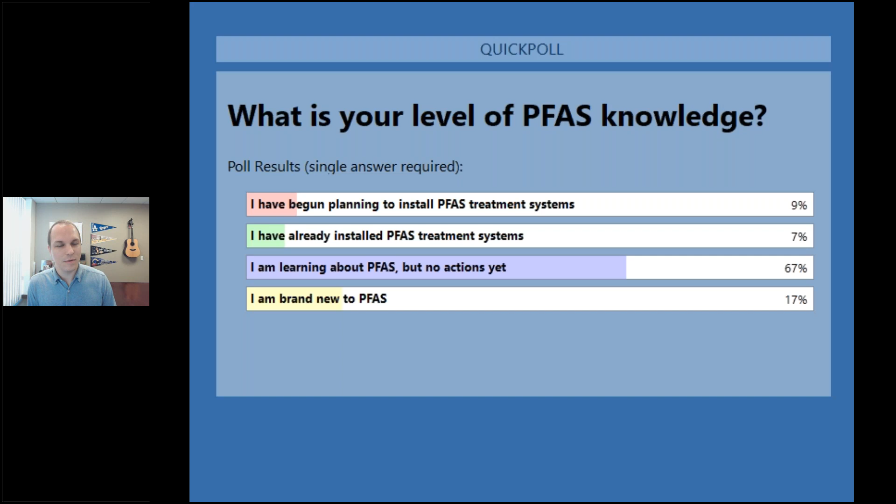All right, so a lot of people are either brand new to PFAS or just learning about it, but haven't really done anything around it yet, which makes sense. We're going to talk about why that is with where the regulations are at. And then there's a few of us that have already dipped our toes into it, or rather been thrown into the deep end of PFAS. And I'm glad we have those people online too to leverage that expertise. Next question for us, Maya.

What is your role? I'd like to kind of understand who we have here on the line, whether you're a regulator, a water or wastewater treatment system or distribution system or collection system owner, or maybe you're an operator, or maybe you're an engineer or consultant advising these types of folks, or if you don't quite fit into any of those boxes, maybe you fall into the other box. Let's take a second to answer that. All right, closing the poll here in 3, 2, and 1.

All right, about half the audience are on the regulatory side of things. We've got some system operators and owners in the house, maybe about a quarter of us, and the rest are engineers or consultants, and some that fall into the other category, maybe some technology folks out there that are looking at technologies around PFAS. So good mix here, heavy on the regulatory side, which is great.

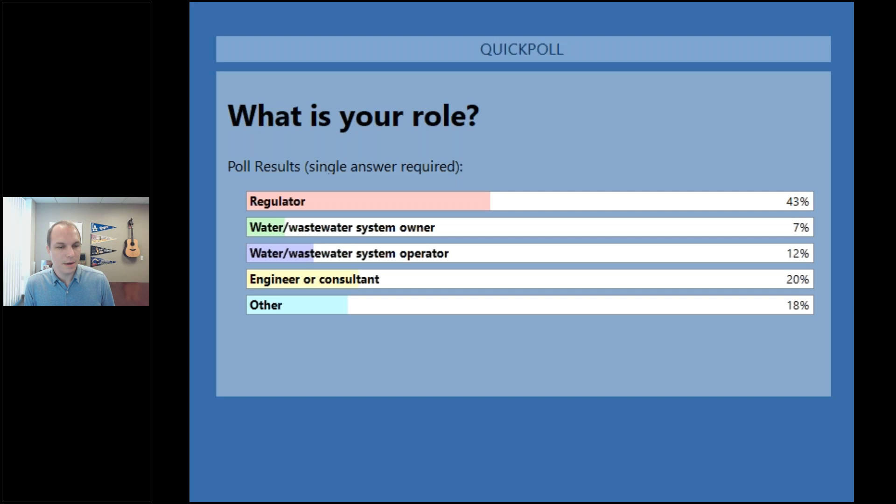And then our final question here, I'd like to understand what you all are most interested in as far as PFAS goes. Is it PFAS in drinking water, wastewater, recycled water, stormwater, or is it something else? And I would put maybe impacted sites, contaminated sites, site cleanup in there, or air quality. We only had 5 options here on our polls, so pick the best option for you. Let's figure out where the concern is, and we can kind of tailor our discussion around that. All right, closing the poll here in 3, 2, and 1.

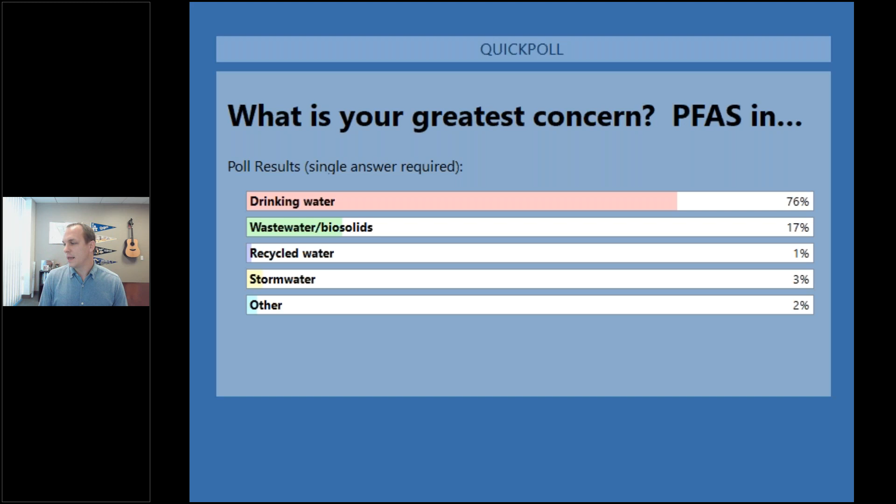All right, drinking water. And that makes sense, and we'll talk about why that is. That's where the greatest level of regulation is and where it's headed. A good bit of wastewater here as well, not so much heavy on recycled or stormwater or something else. And we'll see that lines up really well with what I was expecting, and because of where the regulations are at, why this might be the greatest concern. Also, there's the public aspect of this, news articles and the media, and it's mostly focused on drinking water appropriately. And we'll talk about what that is and why. So thank you for your participation here in these polls.

With that, we're going to jump right into this and start talking about what is PFAS. In your polls, most of you said this is new to you, or you're just starting to learn about it. So I'll focus a little bit more on these earlier slides. I'm going to blow through some of the later slides, which are some of the more technical slides that get a little bit more into the weeds. But since this is something new to a lot of us, I do want to make sure that we got a good understanding of what we're dealing with here.

But if we boil it down, let's keep it simple. If it's something that is heat resistant, oil, grease, stain, or water resistant, most likely that's PFAS chemistry driving that. And these are very useful chemicals and therefore very ubiquitous throughout these consumer products and industrial processes.

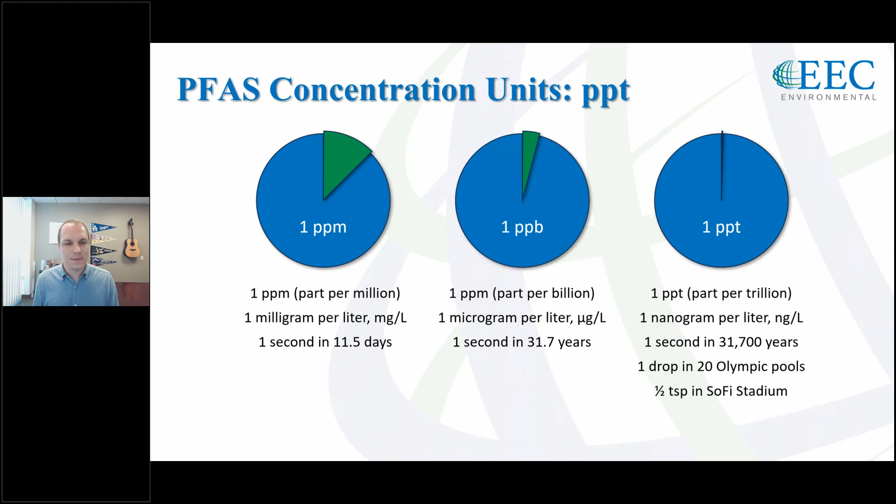If I were to put half a teaspoon of salt anywhere in that stadium, in any suite or under any seat or somewhere on the field or in the rafters, and I told you to go find that half teaspoon of salt, do you think you'd be able to find it? Or how long would it take you to? That's a part per trillion, just about. That's the minuscule amount that we're looking at when we talk about PFAS. That helps me understand and contextualize just how small of a concentration we're talking about.

But I do want to lay the groundwork here for those drinking water MCLs that we talked about. Under the Safe Drinking Water Act, there is a regulatory process that starts with a contaminant list, and then in the orange boxes on the bottom left here is the UCMR program, the Unregulated Contaminant Monitoring Rule. These are contaminants of emerging concern, unregulated. They don't have limits yet, and the EPA is starting to sample for and understand them so that they can develop regulations for those. And the reason why I want to highlight the UCMR program is that's ongoing right now for the next 3 years. EPA has released 2 quarters worth of sampling data to the public out of the 12 quarters over the 3-year program, where they're sampling for PFAS nationally.

And of those 2 quarters, this is as of last month, looking at that data set, what it tells us for drinking water systems, for small systems, 0 to 10,000 customers, and there's transient and non-transient communities there, about 1 in 10 systems come up with concentrations above proposed MCLs, which is 4 parts per trillion, proposed MCLs for PFOA and PFOS.

In total, about 1 in 10 small drinking water systems nationally. For large drinking water systems, PWS, public water systems, that's about 18%, almost 1 in 5 systems nationally exceed those proposed MCL limits. So once those are adopted, that becomes a big issue for these roughly 10 to 20% of drinking water systems nationally. Here at EEC, we took that data set and we wanted to see what that looked like nationally across the nation with our GIS.

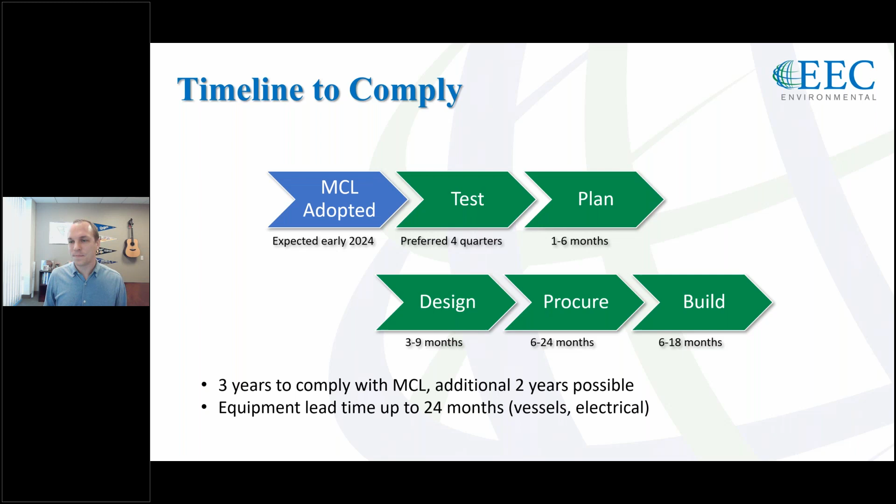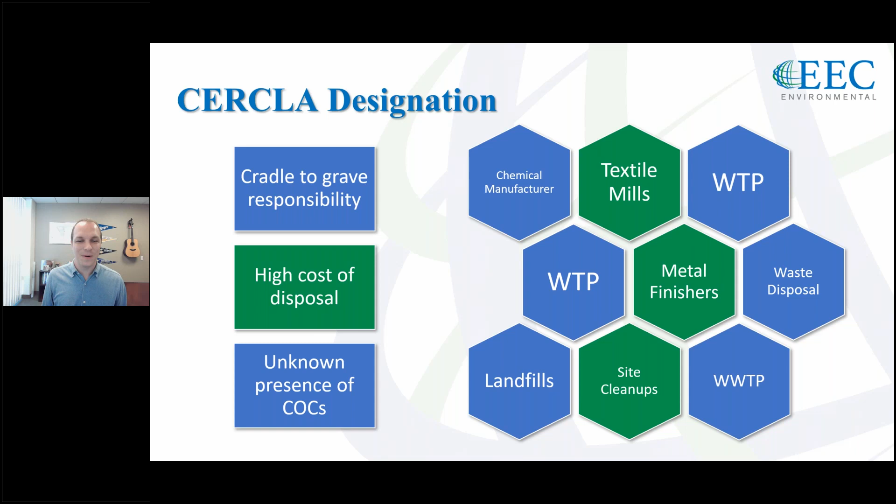There's a lot of implications that come along with a CERCLA designation. We don't have time to go into all of them today, but I wanted to touch on that because it is so important. This has been a lot, so I just want a quick recap. What are the key takeaways here? Drinking water MCLs are, for all intents and purposes, imminent, and then you have 3 years to comply. So act now, don't wait. This is something that we're going to have to deal with, small and large systems alike.

That's the impact side of things, 10 to 20% nationally, small and large. Small 10%, large closer to 20%. It's a problem for everyone across the nation. And then there are still unknowns. There are still regulations pending or future proposed regulations that haven't come through yet. And the cost impacts of complying with those regulations still are largely unknown.

What I want to kind of identify for you is, in a lot of ways, wastewater treatment plants, for us wastewater folks online here, are the center of the PFAS universe. You have domestic and industrial contributions coming in. You have biosolid application maybe to ag or to landfills. You have leachate coming back to the treatment plant from that. You have NPDES discharges to surface waters or ocean discharges.

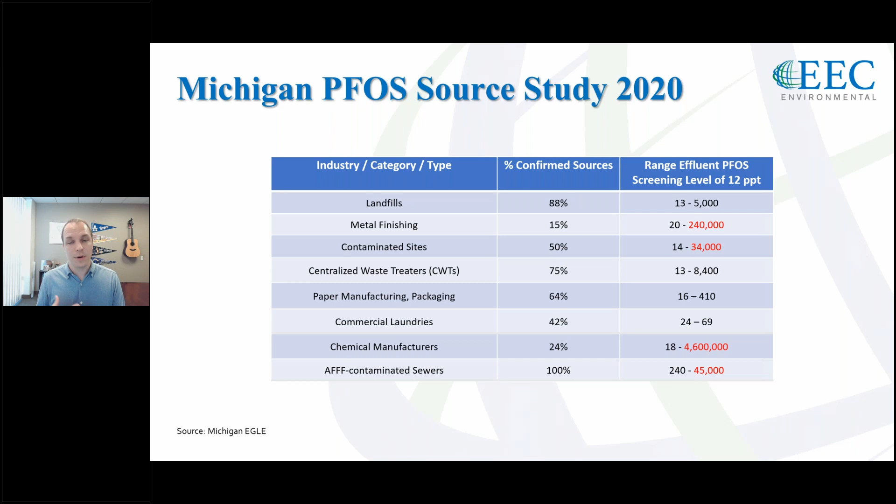It's a range too. But what I've highlighted is, if you want to be smart about sampling, go and look at the most likely sources first, and you may be pleased with what you find, and it may become a much simpler problem for you, if you will, to address.

How do we analyze for this? What are the methods available to us? I'm going to touch very lightly on this. There's a lot that goes into this, and we could have an entire other session on the analytical methods. But for drinking water, there are two primary methods, Method 537.1 and 533. These are the two laboratory methods being utilized by the EPA under the UCMR 5 program that we talked about, the National Sampling Program. They're utilizing these methods for drinking water samples.

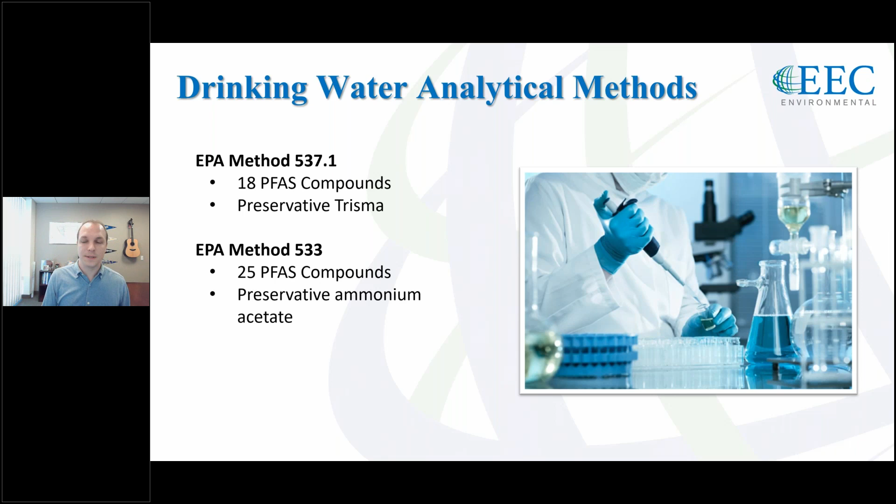And then on the wastewater side of things, there's the draft Method 1633, which is already being widely used. It's still a draft method. It hasn't been promulgated yet, but it's for non-drinking water matrices, in particular wastewater, soil, sediment, groundwater. What I want to highlight is there's 40 compounds we can sample for. The two drinking water methods combined, we can maybe get 30; under UCMR 5, they're doing 29. Wastewater side, we've got 30 to 40 listed compounds that we get measurable concentrations for out of 5,000, right? So what we're talking about is tip of the iceberg here.

There are other analytical methods that help us kind of understand how much of that iceberg is below the water surface. That's the TOP assay. These are precursors. I won't go into exactly what that is, but the PFOA, PFOS that we're most concerned about, these are terminal compounds. They have other compounds that are called precursors that ultimately break down in the environment into those terminal compounds that no longer break down. We can identify how many precursors there are through this TOP assay analysis.

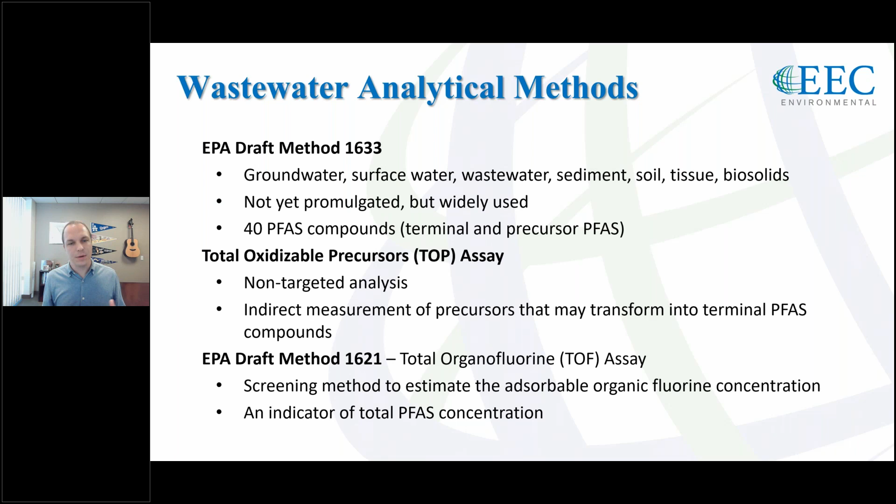The other one's draft 1621. This is total organofluorine assay, TOF. What this measures, it's an indicator analysis that measures all fluorinated chemistry within your sample. So like I said, it's tip of the iceberg. We're here on the Titanic, the proverbial PFAS Titanic. We have a couple of tools available to us.

Say we take a hypothetical wastewater treatment plant influent sample, and we run it through 1633, analyze for 40 compounds. We may get, and add those all together cumulatively, around 100 parts per trillion. Maybe it's 40, maybe it's 400. Magnitude of 100 parts per trillion. If we run the TOP assay analysis on that and look for those precursors of those 40, we may get somewhere cumulatively on the order of 1,000 parts per trillion, an order of magnitude greater.

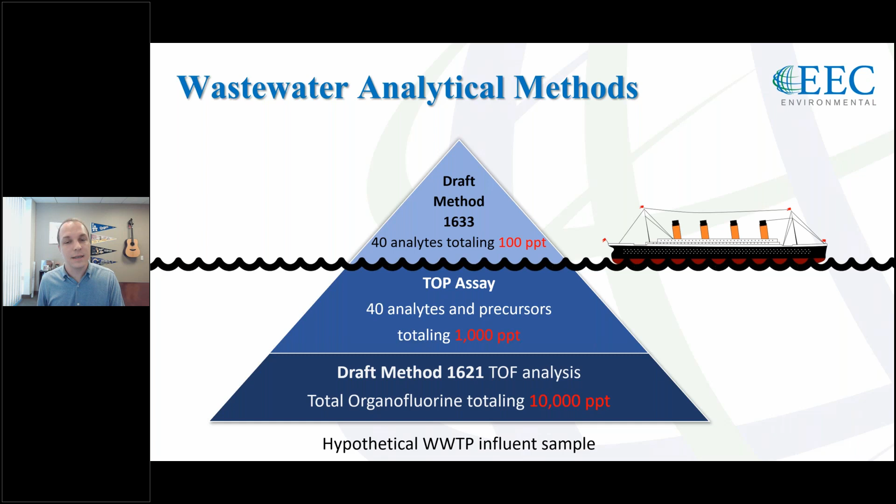And you run 1621, this indicator analysis, you may get something like 10,000 parts per trillion. That may be a lot of PFAS, it may be other fluorinated chemistry in there. It's an indicator, but it kind of helps us understand how much PFAS is there, whether we can quantify it into specific compounds, specific chemical structures, or if it's just more part of the general PFAS class of constituents.

That's a lot. Let's recap here. Let's pause. Let's take a breath.

What's important? Look at source. Source identification is crucial. If you have a PFAS problem or impacts, let's see what are the sources that are causing that. There are some sampling analytical methods available to us for drinking water and wastewater, but understand it may only show us a portion of the overall picture. It's good enough, it shows us enough to comply with regulations today, but where are those regulations headed?

And then understand that it's ubiquitous. It's all throughout the environment, so it's not going to be a one-size-fits-all solution to deal with PFAS. You may need a toolbox approach. And let's talk about some of those treatment options that are available to us. I'm going to go even faster through this.

We could do multiple presentations on these treatment options, but what I want you to take away from this, if you're a drinking water system, small or large system, there are mature technologies available to you should you have PFAS impacts that can be implemented and treat to non-detect levels to comply with these MCLs. That's what I want you to understand. There are technologies available, you can implement them, and you can treat for PFAS.

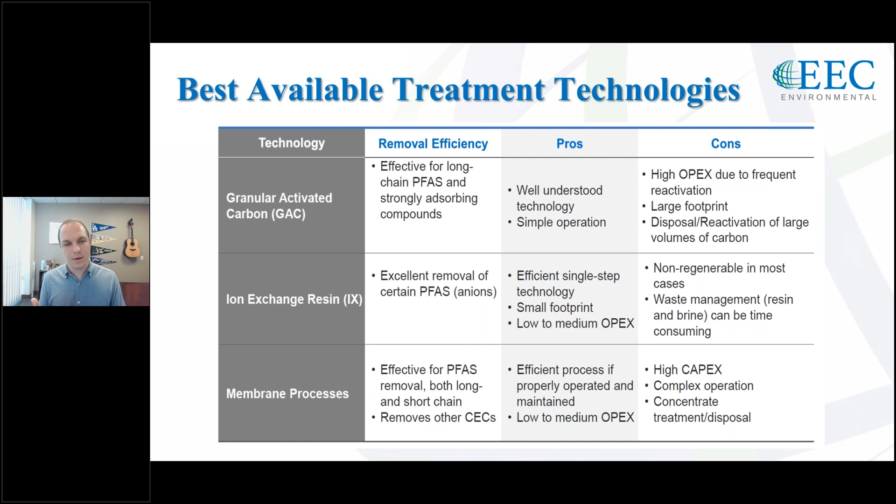Like I said, membrane, that's a higher cost option for drinking water systems. And the big thing to remember about membrane systems or RO systems is you do still have that liquid waste stream. You pass the water through a membrane, clean water goes out, but you still have that concentrated waste stream to deal with. And the question then is, how do we deal with that?

I'm a visual guy. I like to understand what is GAC, what is this carbon, ion exchange resin. These are just some pictures, and I'll lump novel adsorbents in here too. This is an emerging technology that acts in a similar way to GAC and ion exchange. It's an adsorptive technology, but it is demonstrated to be more selective towards PFAS treatment, and that has a lot of benefits. But GAC, think of it like charcoal, granular activated carbon. Ion exchange are these little tiny resin beads, and then novel adsorbents like fluorosorb. I have a picture here.

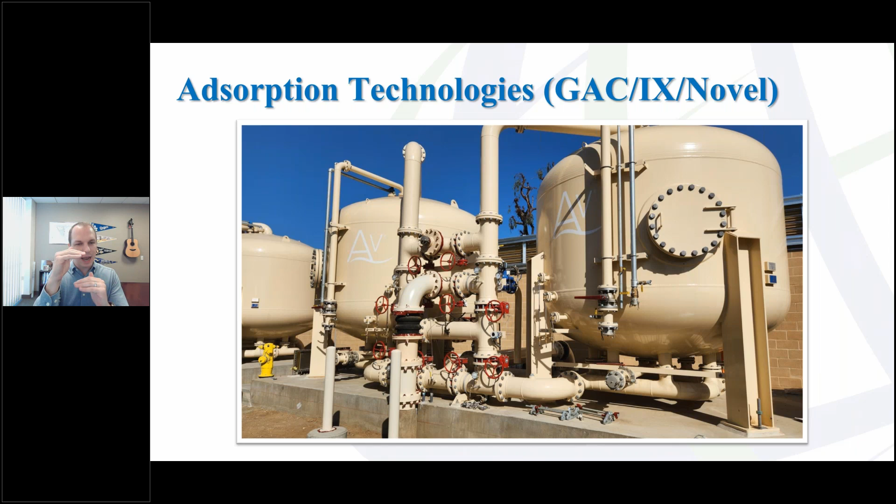You put these in media beds within pressure vessels. This is a picture of a pressure vessel treatment system we put in here in Southern California. And so they have a bed of media inside of them that the water runs through. You put them in this lead lag configuration. Here's an example if you have a wellhead treatment system, what that might look like from a process flow standpoint. You have your existing well, maybe you went straight from well to distribution with disinfection previously. Now you're going to add on this pre-filtration, these lead lag pressure vessels loaded with either carbon, GAC, or ion exchange or novel adsorbents.

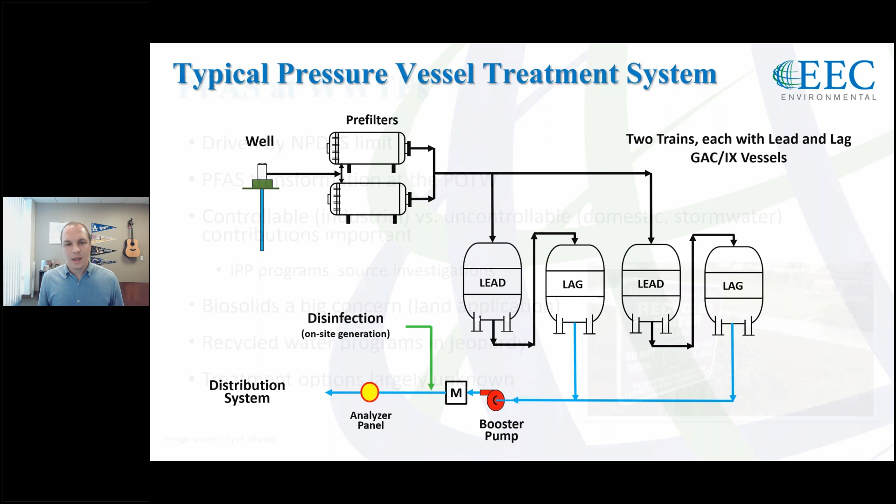Again, we could spend an entire hour on this, but I just want you to know there are technologies, we do know how to implement those, and we can treat for PFAS with those technologies on the drinking water side. For all you wastewater folks out there, let's touch on that a little bit.

The regulations are starting with drinking water, and then logically, as you move up the environmental chain, that drives drinking water sources like surface waters or groundwater, that drives discharges to those sources like NPDES discharges from wastewater treatment plants or reinjection into aquifers like we do here in the Southwest. So this is largely at treatment plants driven by NPDES limits. That is the limits on the effluent going out of your wastewater treatment system into the environment, whether that's to a river or an ocean or something like that.

There are only a few places that currently have PFAS limits. That is going to change as drinking water MCLs are adopted, and then the cascading effects, the regulatory dominoes from there. But that's the driver for a lot of these treatment plants. And what I want to talk about and focus on here is if you are a treatment plant, if you have a PFAS permit limit that you have to comply with, and you want to understand how to comply with that. Again, I'm going to point towards Michigan because they've done the most around this issue.

They have PFAS limits at some POTWs in Michigan, and they have had success meeting those limits in many cases by controlling the sources. We talked about looking for those sources in your community, whether it's an industrial source or not, and how to regulate upon those to control what's coming into your plant so that you can control what is going out of your plant. And that's done through pre-treatment programs, source investigations, technically based local limits. I'm not going to go into all of that, but it's very complicated. But the good news is, in many cases, by controlling those sources coming into your plant, you can reduce PFAS coming into your plant and thereby reduce what's going out of your plant.

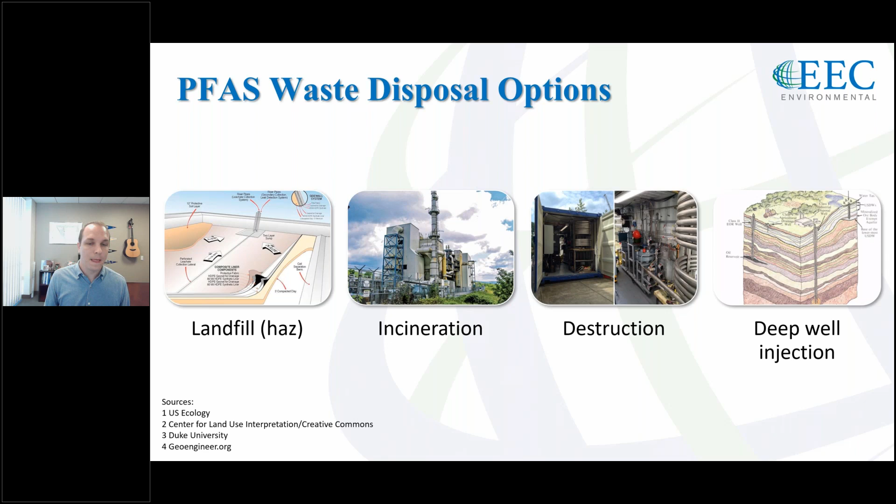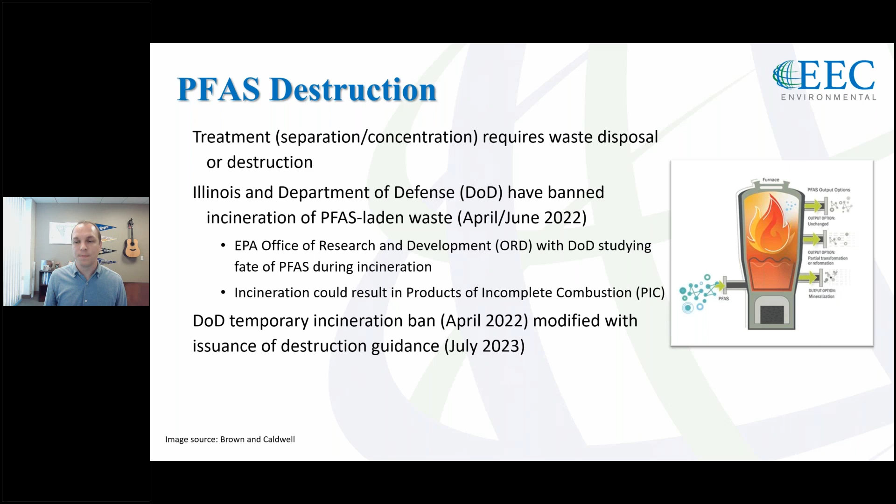Again, I'm not going to go into all of those, but one thing to be aware of when it comes to PFAS disposal is not spreading PFAS, but being smart about it and ultimately properly disposing of it or destroying it. One thing to be aware of in PFAS destruction is, are we ultimately destroying it? That's being looked at, particularly on the incineration side. Are we achieving full destruction, or are we just breaking it down at incinerators? Are they burning hot enough to facilitate that ultimate destruction? It's the carbon-fluorine bond that needs to be broken. This just talks about some things to look out for. And then PFAS destruction technology, I said these are emerging technologies. You'll see a lot of shipping containers in these pictures.

They're being scaled up quicker and quicker, and a lot of money's being spent to research this. These are a couple of those emerging technologies that are showing promise for ultimate destruction of PFAS. And so in a lot of cases, these are pilot scale, they're being scaled up. They're in a lot of cases low flows and high concentration of PFAS.

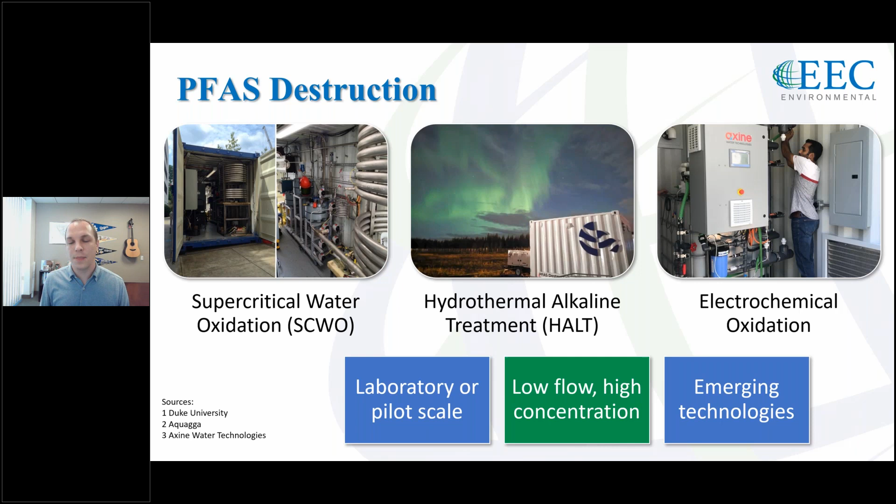We would love to flip that, where if it's high flows and low concentration, we can still destroy it. That's more readily implemented at something like a treatment plant. But there is a lot of promise around this area of ultimate destruction, oxidation technologies, and they're continuing to evolve.

Let's all breathe. This was a lot. And I want to recap the quick takeaways. There's a lot of technical stuff in here, a lot of mumbo jumbo, a lot of letters, alphabet soup type of stuff. For those of you who are attending and are walking away from this, what do I want you

to walk away with? There are existing treatment technologies, best available technologies that can treat for PFAS that are mature technologies. They've been established, they've been demonstrated as effective technologies, particularly on the drinking water side, which is the next regulation to follow, which is the proposed MCLs soon to be adopted.

The difference between water and wastewater, I put simpler here, maybe that's oversimplifying it, but water is simpler because we have these established technologies that have been demonstrated. Wastewater, due to the nature of wastewater and the competing anions and organic chemistry in there, treatment of wastewater is a more complicated situation, and it's continuing to evolve and being looked at.

And then the ultimate disposal, destruction, how do we get away from PFAS in the end, is ultimately by destroying it, inerting it, mineralizing it. Those technologies are continuing to be developed. It can be a complicated issue though, and nationally, universities and the EPA and agencies are looking at this and developing that science and guidance around it.

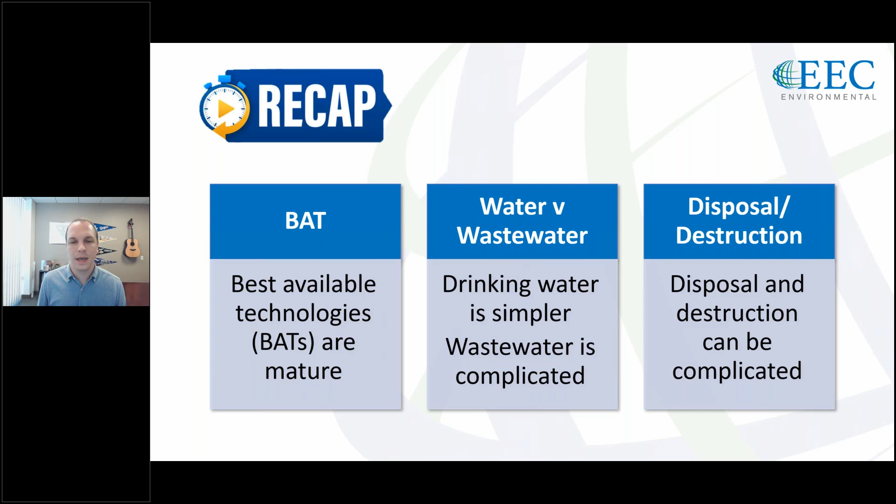The last option, if you do have to address PFAS, what are the options available to me for funding that? Especially for small systems, you may not have the capital readily available to do so. Luckily, there are some funding options, particularly from the bipartisan infrastructure law that was put into place. There's been an allocation of billions of dollars. I believe it's 9 billion total, and 2 billion have been greenlit for distribution for PFAS projects to assess and treat for PFAS. There may be grants to that effect.

There may be grants or low interest loans available to communities, especially disadvantaged and small communities. That may be on a state by state basis. There may be local agencies that distribute that funding, particularly at the state level, state revolving funds. There may be funding available to you for these types of projects.

And then litigation and cost recovery. You may have seen headlines in the news about the 3M settlement, the $10 billion settlement for public water systems nationally to fund treatment for impacted systems. There may be options there through litigation or cost recovery to fund those projects.